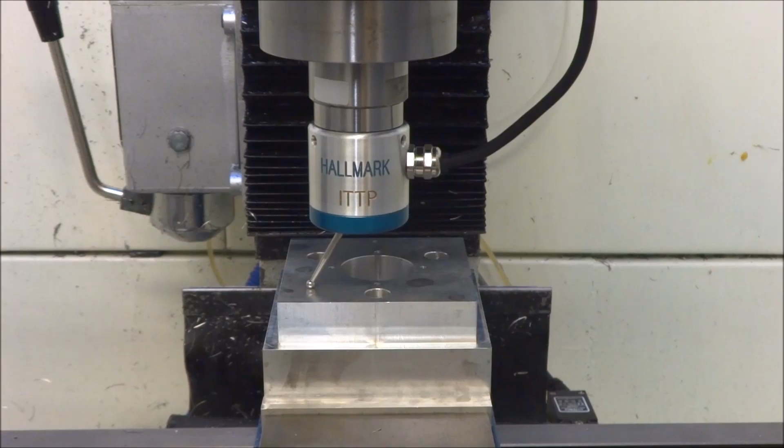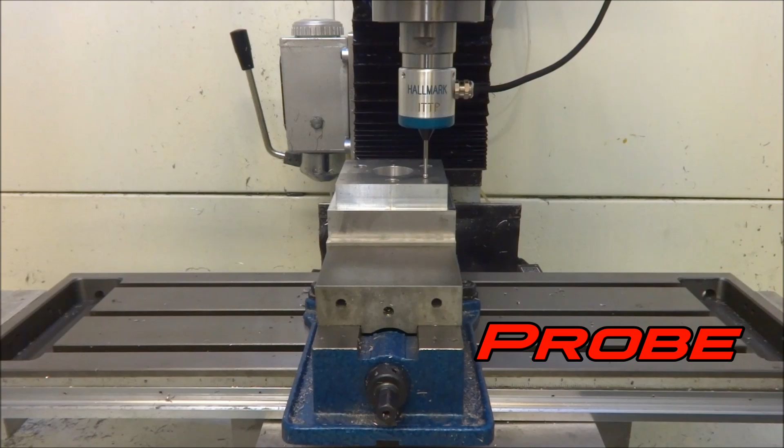Hey guys, I'm back out in the shop today doing some accuracy tests on the impact tolerant touch probe from Hallmark Designs. Please excuse the background noise, I've got a portable AC running. It's just unbearable without it.

The first thing I want to do is make sure there's no run out on the touch probe. I've rechecked it. I've had too numerous to count the crashes I've had already developing the probing routines, so I wanted to recheck it and make sure everything was okay. In today's video we're going to be doing some accuracy tests.

One thing I've realized over the last few days doing numerous tests is because of the design of the contact surfaces in the impact tolerant touch probe, you really only need to concentrate on one 90-degree quadrant. That's with checking for run out and also doing probing. You can see here that I've got it dialed in, there's no run out whatsoever on the touch probe.

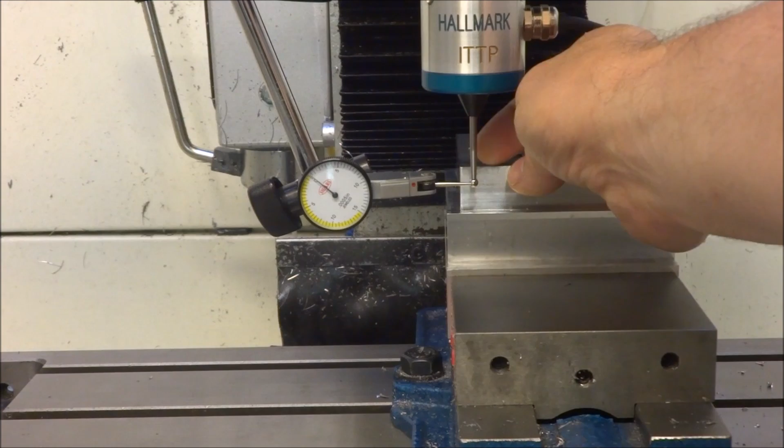So once we verify there is no run out, we can check pre-travel. The first test is to check pre-travel, and I'm going to probe into the work and see how much deflection we have when the needle stops. We're resting on the dial indicator here.

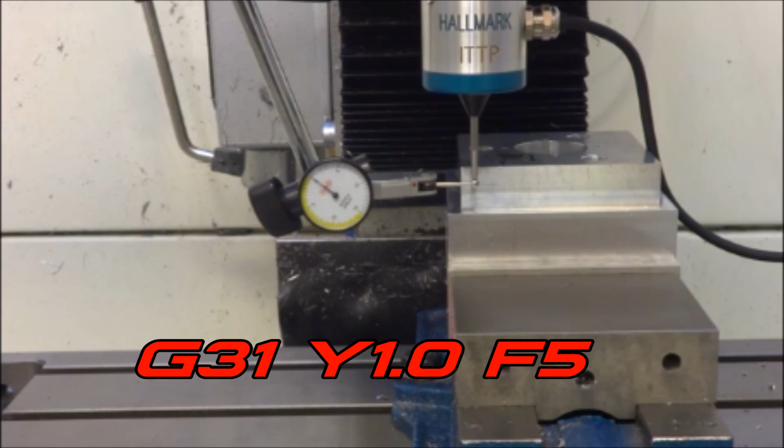To check pre-travel, we want to simply type in on the MDI line under the MDI tab: G31 Y1.0 F5. G31 is a probing move, and it will stop as soon as the probe makes contact. I'm going to probe in. Okay, it stopped, and it looks like we are at 1.5 thousandths, 0.0015.

I'm going to turn it about 10 degrees and go again. Still about the same, about 1.5 thousandths. Back off, turn it again about 10 degrees, thereabouts approximately. Again, 1.5 thousandths.

Back off, turn it again about 10 degrees. Okay, that crept up a little bit more, maybe 0.0018 if I had to guess.

Now that we know what our pre-travel is, let's start doing some accuracy tests. First, I want to go over some important things you should be aware of when using any touch probe. Number one, you want to indicate the touch probe in the same orientation every time you use it for better accuracy. So if you're going to have your cord going out at 90 degrees, indicate that. Likewise, you should have a way to disable your spindle motor.

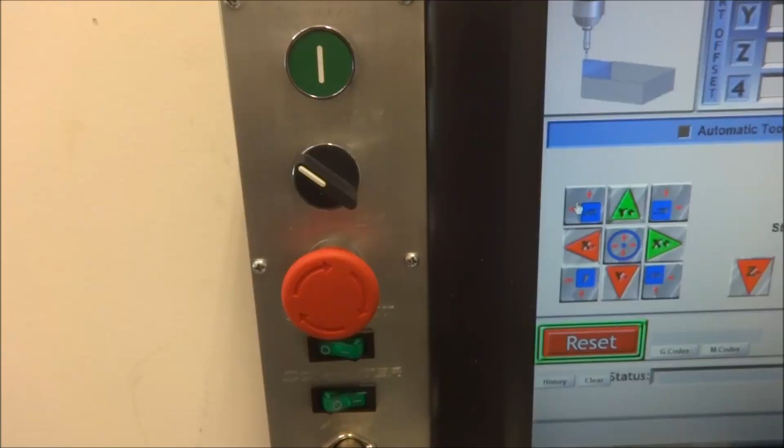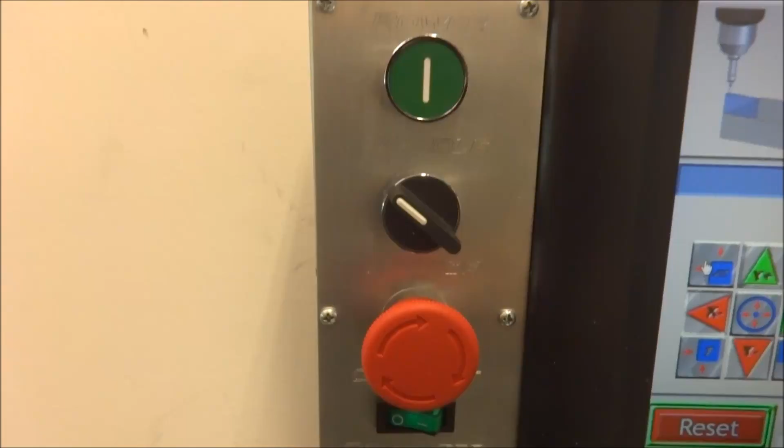Now, I originally installed a key switch here to turn off the spindle. However, I found the key was cumbersome, it kind of hung in the way of the e-stop, so I switched it out with just a switch that I can turn off or on. It's good to have that, because you don't want the cord whipping around and causing any issues or damage to the probes.

For the first test, I want to first make sure that we get the pre-travel set correctly. Now, we measured anywhere between 0.0015 and 0.0021. So if we go with the highest reading, we have about 0.0042 of pre-travel. So we're going to take that information and set that up in our tool data.

Okay, so we want to set that up in our tool data. Here is our tool information. I have set up my touch probe as tool number 99. I figured my offset in the first video, and so the diameter, taking into consideration the pre-travel, I came up with 0.1538 is what it really should be according to my pre-travel measurements, but I've done a few tests already and it came out to be 0.1534.

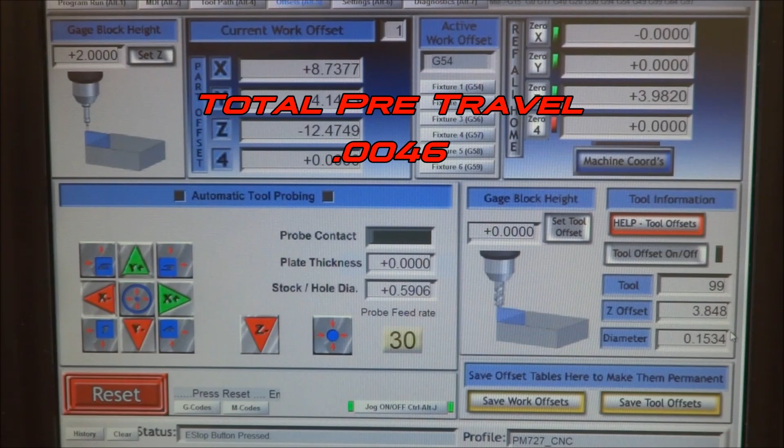Now, I'm not sure about all the different machines and software probing routines that are out there, but the way I've gotten my probing routine set up, I made a couple of changes from the first video. The first thing you might notice is I added this probe feed rate. This is a user-defined DRO, and you can use this to help determine at what feed rate your particular machine gets consistent results. This particular machine, I've done a few tests here, and at 30 inches per minute I can get consistent results. Having this user-defined DRO kind of helps you get the best results for your particular machine. So that is something new that I recently added.

Also, I'm going to be probing the inside of a bearing. The reason being is I know this particular bearing is 15 millimeters internal diameter, which is 0.59055, so that way I can check the accuracy without any question.

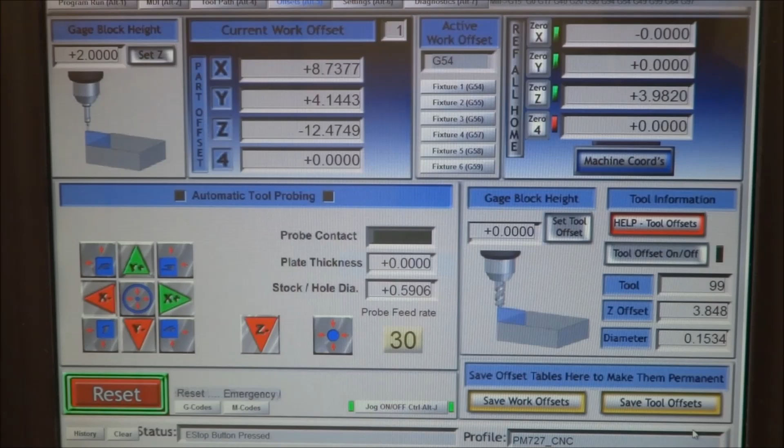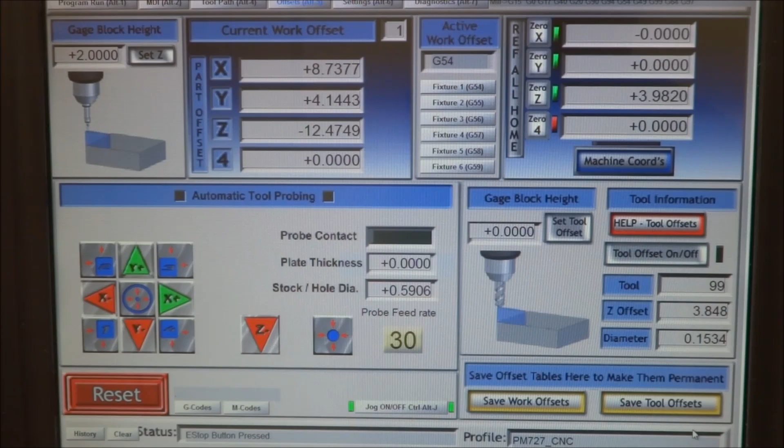Next, this particular DRO will output the dimension that Mach 3 gets as its result. So this is how I am checking the accuracy of my pre-travel, and it's fairly close. I measured 0.0021, so you double that, which gives you 0.0042, and after doing some probing tests I ended up with 0.0046. So pretty close. Let me show you how I came up with this result.

Okay, so here is my bearing. The internal diameter is 15 millimeters, and we're going to probe it at 30 inches per minute.

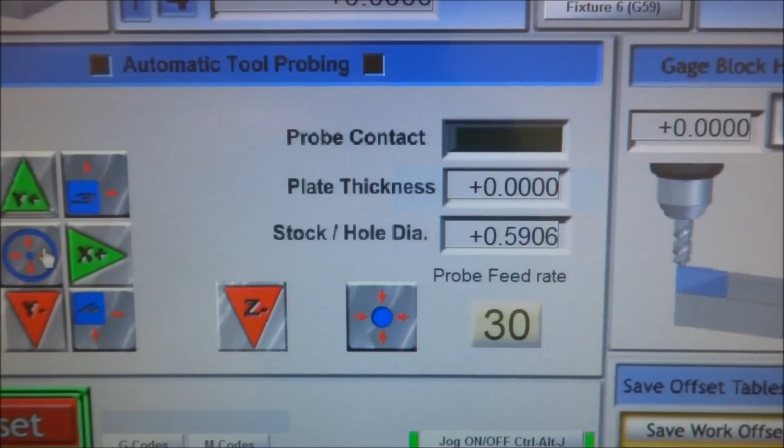Alright, you can see we're at 0.5906. So what I want to do now is just run about 10 probes at 30 inches per minute, and we'll record our results, and we'll see how consistent we are.

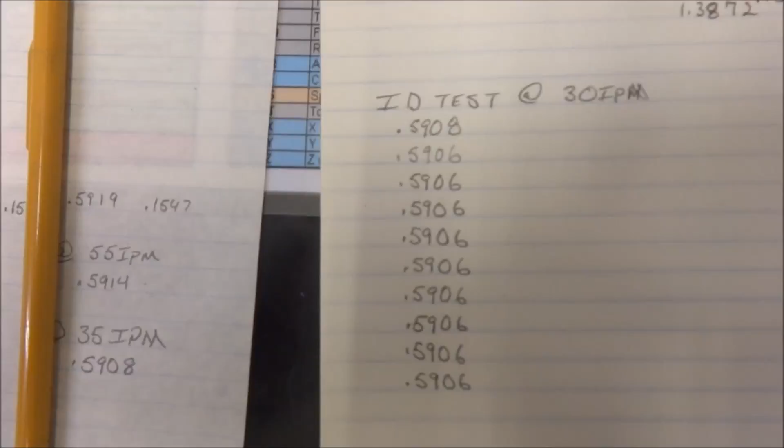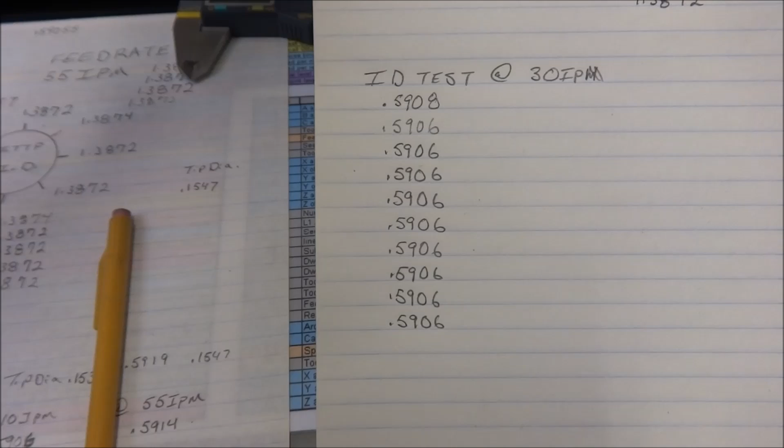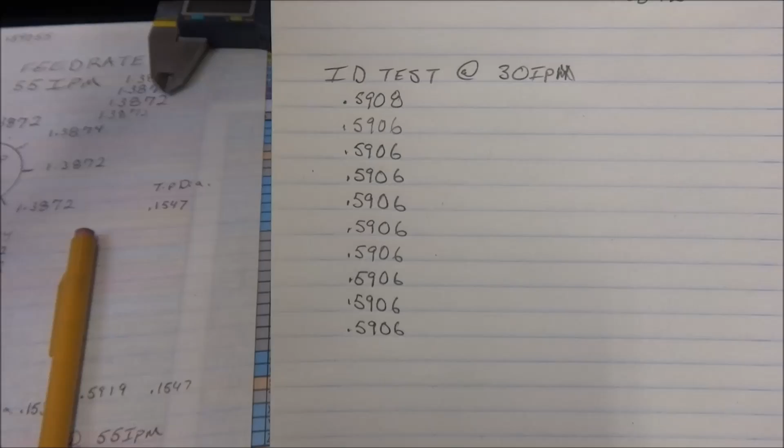Alright, let's look at the results. So I ran 10 tests at 30 inches per minute, and they were all consistent except the first one, which was 0.5908. All the rest were 0.5906, which is really good and consistent.

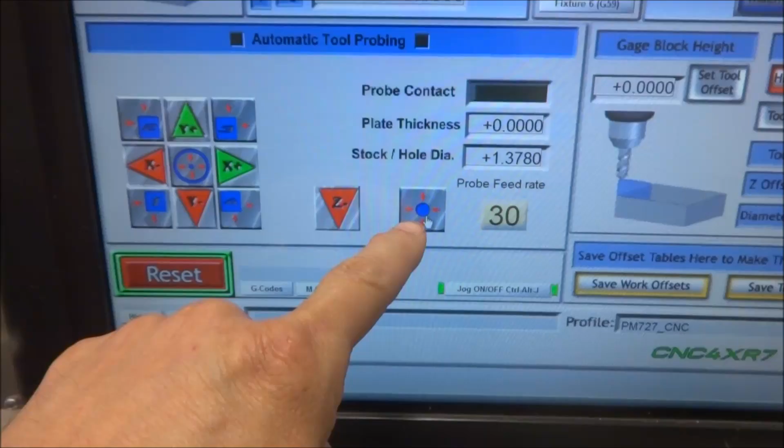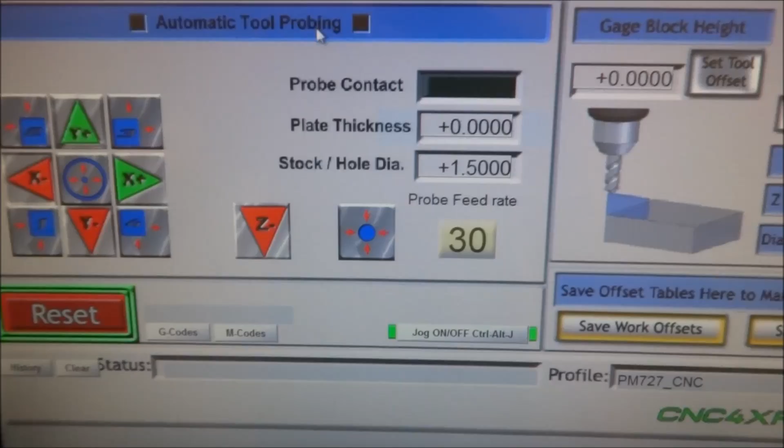Now let's probe the outside diameter of this bearing. This bearing is 35 millimeters, which is 1.37795. Again, we're going to be using the outside dimension probing routine. Now, whenever you're using this particular routine, you want to input the approximate size of the stock, and don't forget to put in your feed rate. Again, we're going to run about 10 different probes, and let's see what we get, and we'll record our results and see what we find.

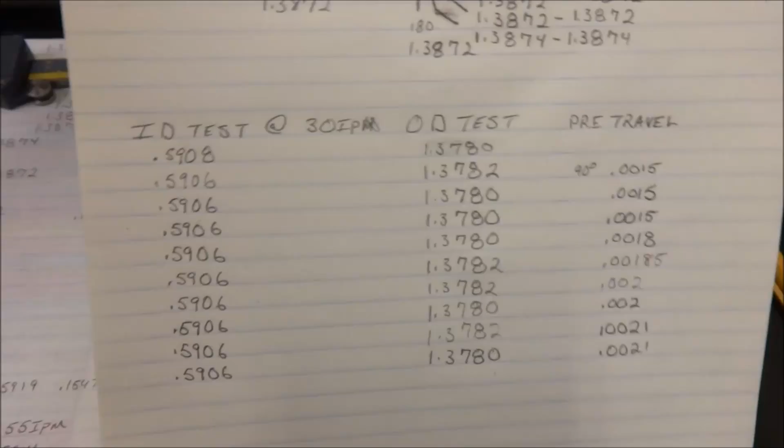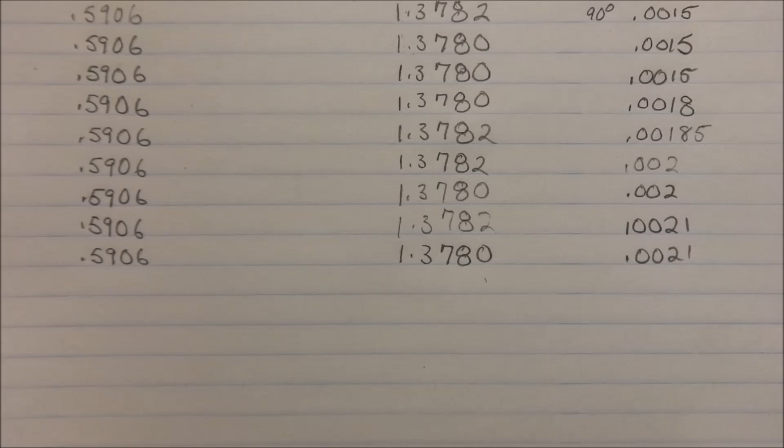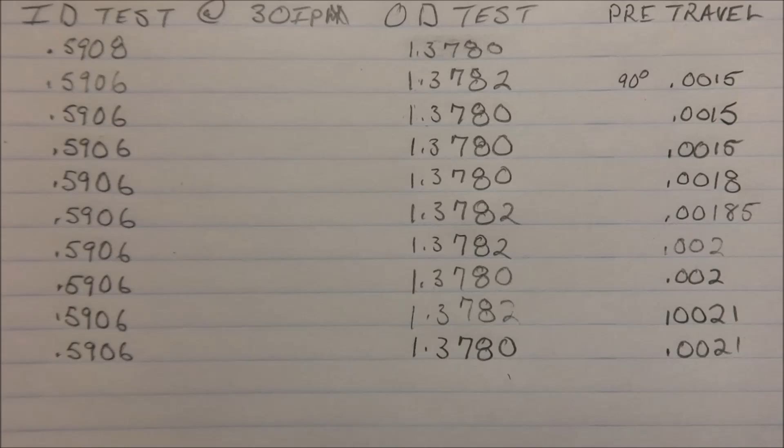Okay, after 10 probes on the OD, you can see the results. Still really consistent, 1.3780, and those were most of the measurements, and 1.3782 happened 4 times, so about 60-40, I guess. But the variance is very, very small, really accurate, and I'm really happy with the results I'm finding.

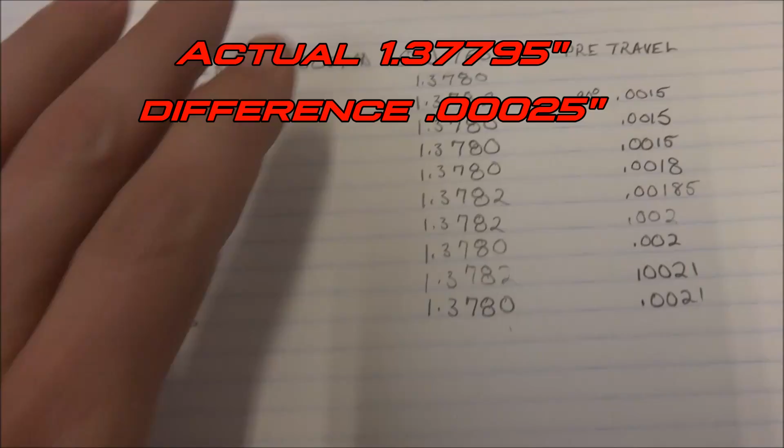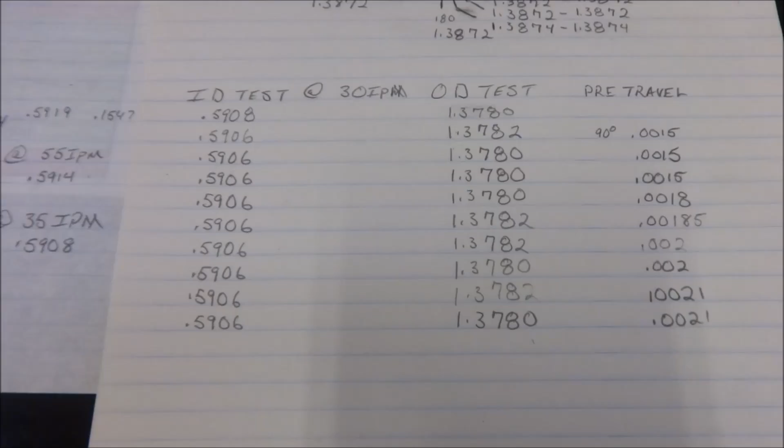So you can see from these tests that we get very reliable and very consistent results with the impact tolerant touch probe.

So the next test for accuracy that I want to check is doing the Z negative probing routine and finding the top of the stock. This is probably going to be one of the more used probing routines, so I definitely want to check and see what the accuracy is for this particular routine.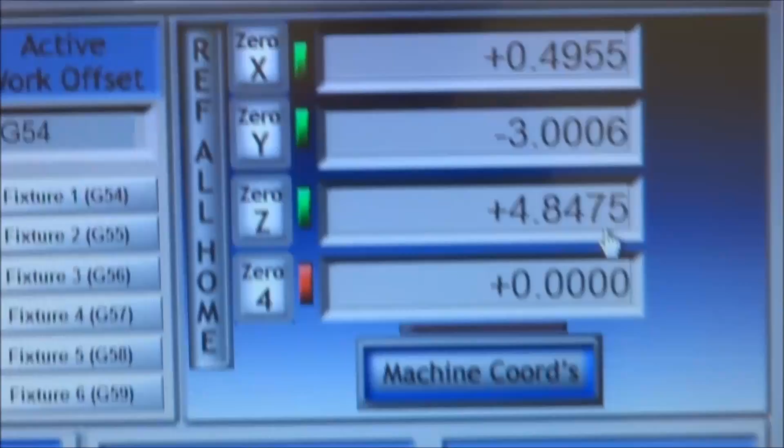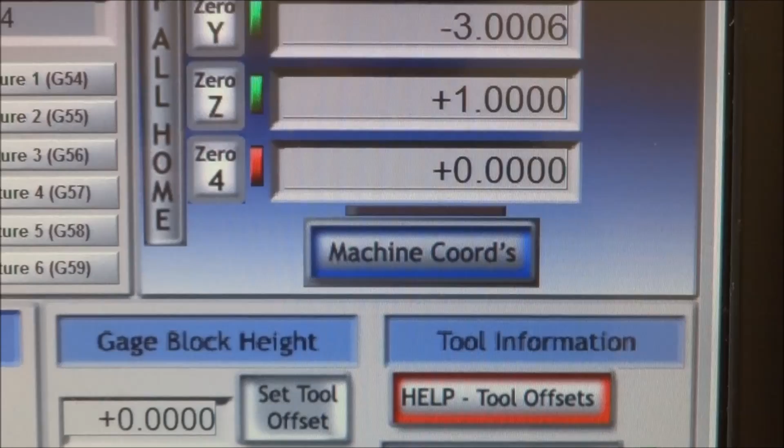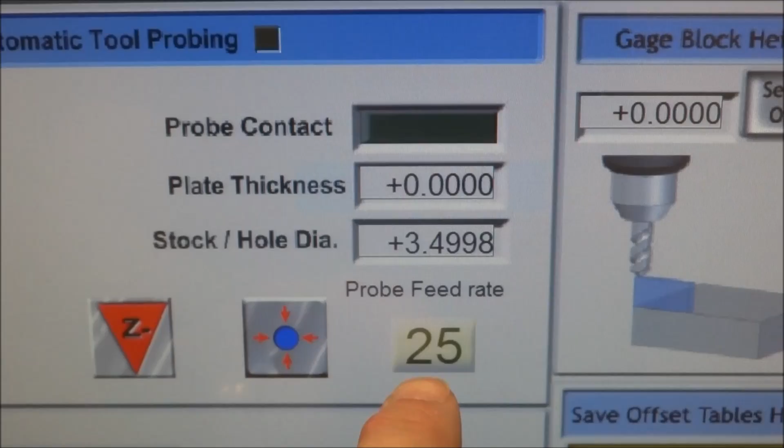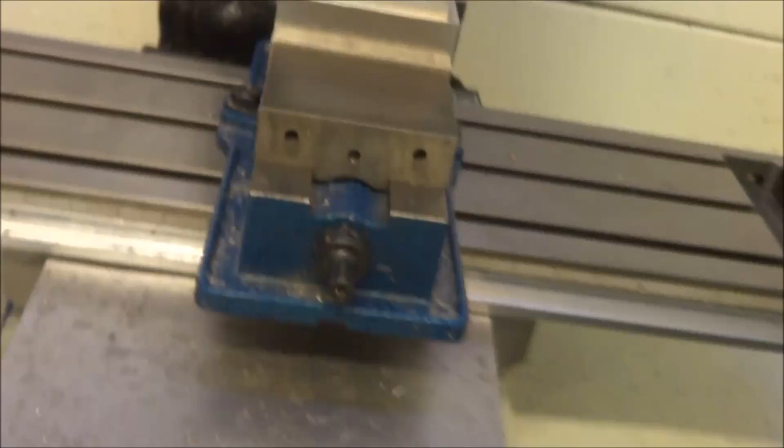Now, the touch probe is always going to return a measurement of 4.8475, because the particular macro moves 1 inch above the part after it checks the Z0. So we're going to use our machine coordinates, and this will always give us the exact measurement from our home switch. So this number right here will vary after each probe. Alright, so we're going to be doing our first 10 probes at 25 inches per minute, and we'll record all of our data here, and we'll see what kind of results we get. I'm also going to vary the start height just to try to get some consistent results. So here we go with the first.

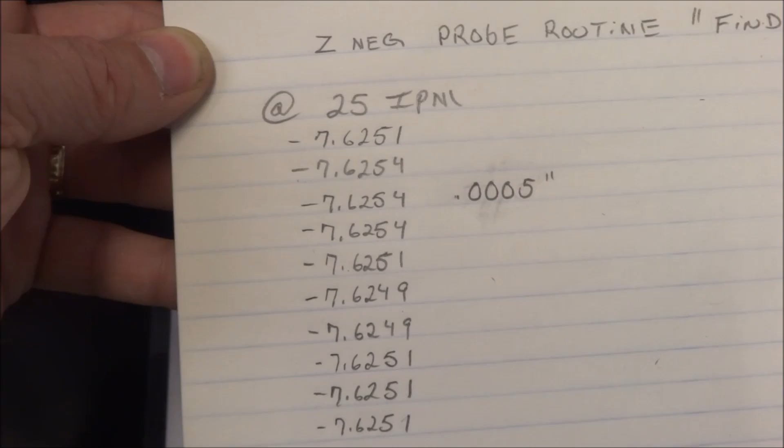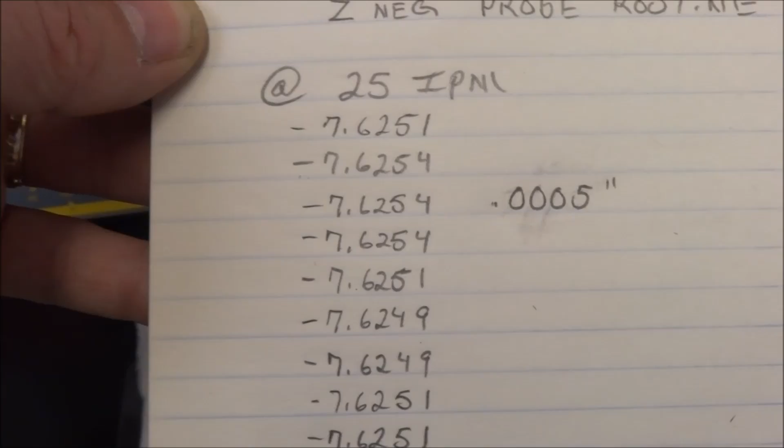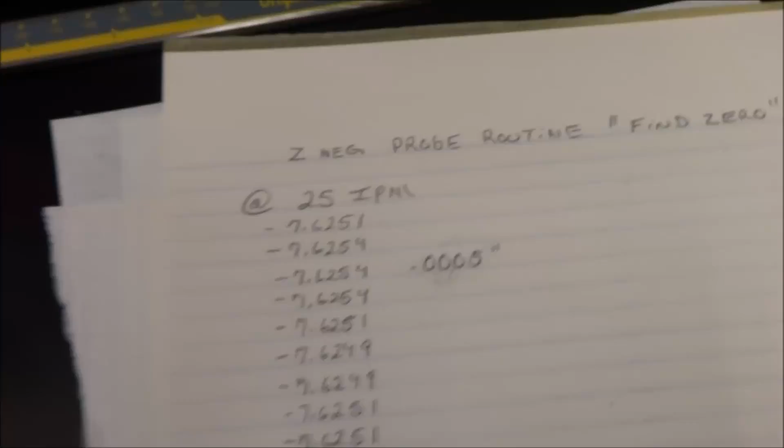Alright, let's check our results. At 25 inches per minute, it looks like our lowest reading was 7.6249, right there in the middle, there was a couple. And then our highest was 7.6254. So the difference between our lowest and highest reading is half a thousandth of an inch. I would say that that is pretty accurate. Alright, so that's at 25 inches per minute.

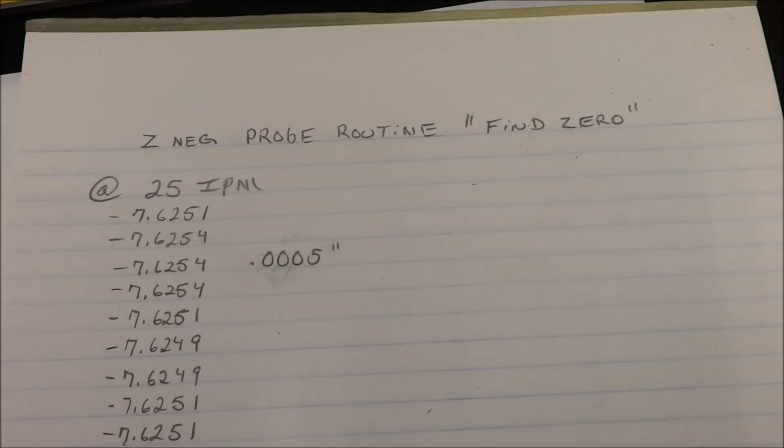Let's try 55 inches per minute. We'll do the same routine and we'll see what we find. Okay, so we'll type in 55 inches per minute in our DRO and record our results.

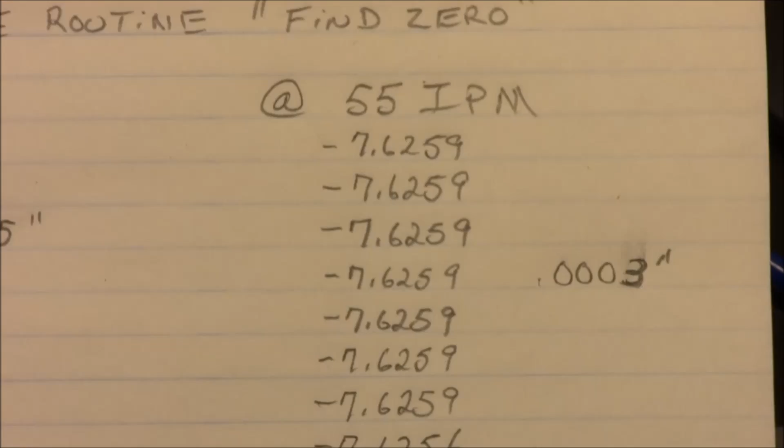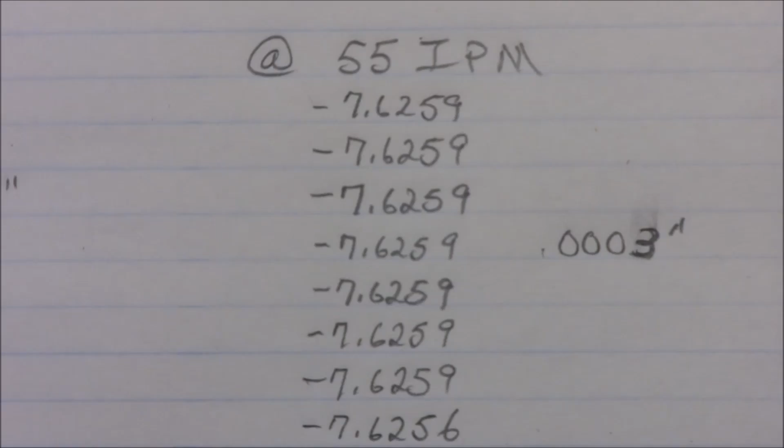At 55 inches per minute, we're getting readings around 7.6256 and 7.6259, a difference of 0.0003. So less than half a thousandth of an inch.

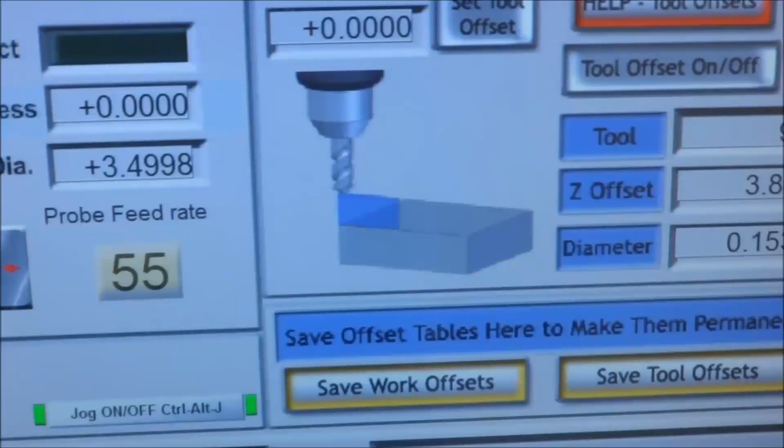Pretty consistent. The Z probing routine is only going straight down, so I would expect to get more consistent results with the Z probing routine. But even with the inside dimension and the outside dimension, you can get really accurate measurements.

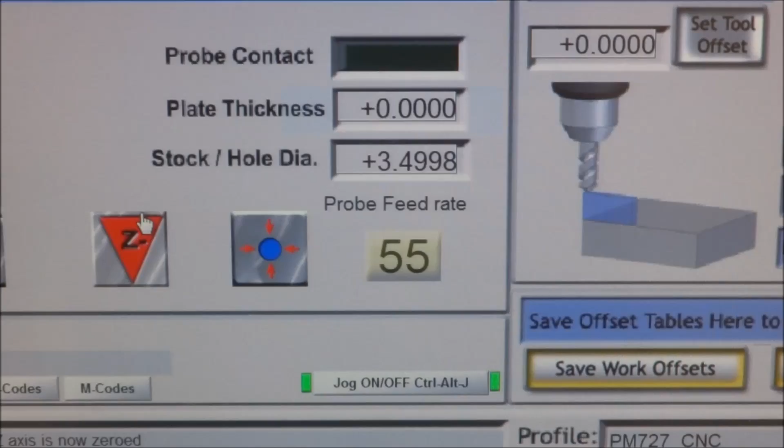So if you want to set up your part and find, say for instance, this corner, you want to park the probe about a ½ inch in from each side of the stock, as well as a ½ inch above. The probing routine will find your Z, set your Z height, and find the corner.

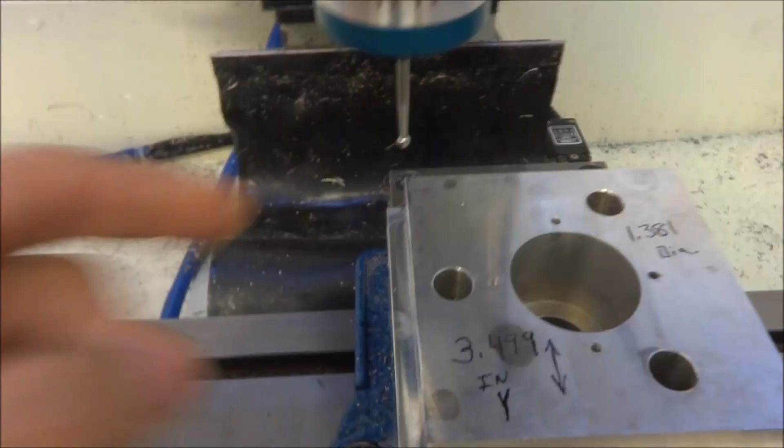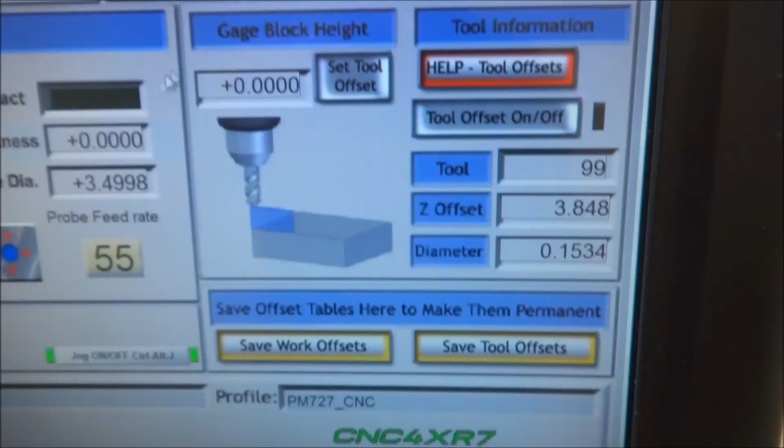Just like that. And now we have referenced our part, and we can start machining. We have also set our Z height. If we turn our tool offsets on, you will see that we're about a ½ inch above the part.

So you can see with these results, the accuracy of the impact tolerant touch probe far exceeds my expectations. I'm very satisfied with these results.

I happen to be using input 15. You want to set up your Mach 3, make sure your probe is active. This is up under ports and pins, input signals. Enable the probe, set it up for port 1, and whatever pin you're using as your input signal. I'm using pin 15, and you want to set it up for active low.

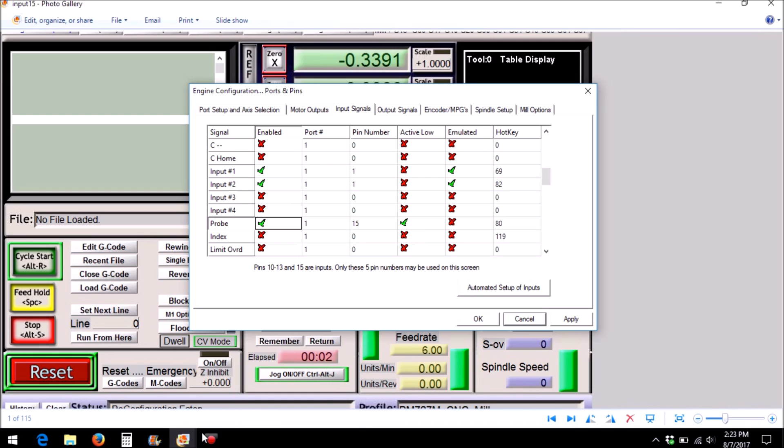The probe is designed in a rest position to make contact. So 5 volts will always be going to the input, and this input will be high in a normal state.

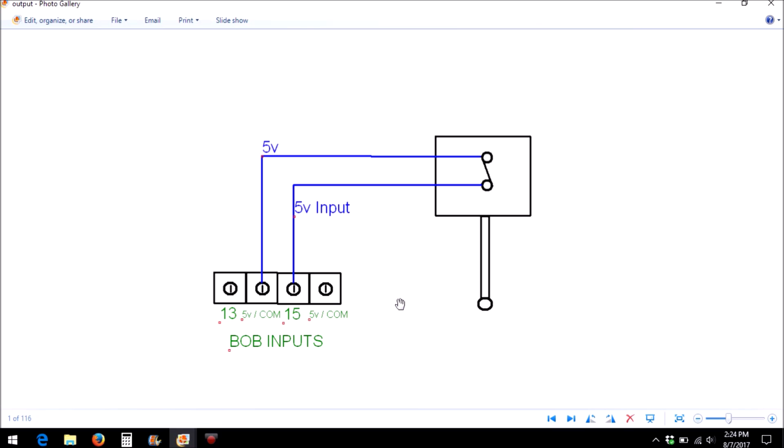And when the probe contact is made with the probe, this signal will go low. So you want to set it up for active low. This is so the probing routines can check to make sure that this probe is not tripped, and the only way to really do that is to have this as a normally closed set of contacts.

Now the connections I went over in the previous video were specific to my machine. However, it's just a 5-pin DIN connector. You can pick up a 5-pin DIN socket online, and we're going to be using pins 4 and 5.

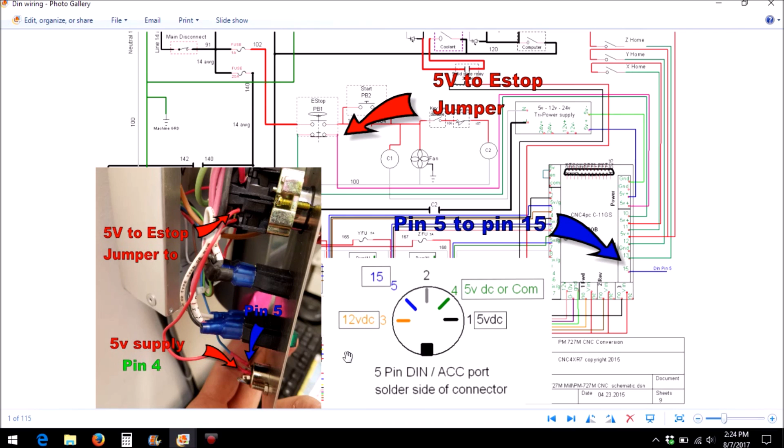Now these are standard pins used on a MIDI connector. And here is your standard MIDI connector, again pins 4 and 5.

So if you need an extra long cable for whatever reason, you can pick up a basic keyboard extension cable with 5-pin DIN connectors on each side. This one I picked up was 10 feet, and they come in 3, 5, 10, and 15 foot lengths.

So if you need an extra long cable, you can simply clip the end off and wire it into the probe. It does come with a 6-foot cable for non-Tormach owners, and I think for Tormach owners it comes with a 3-foot cable, because their DIN connector is right there inside, right beside the mill.

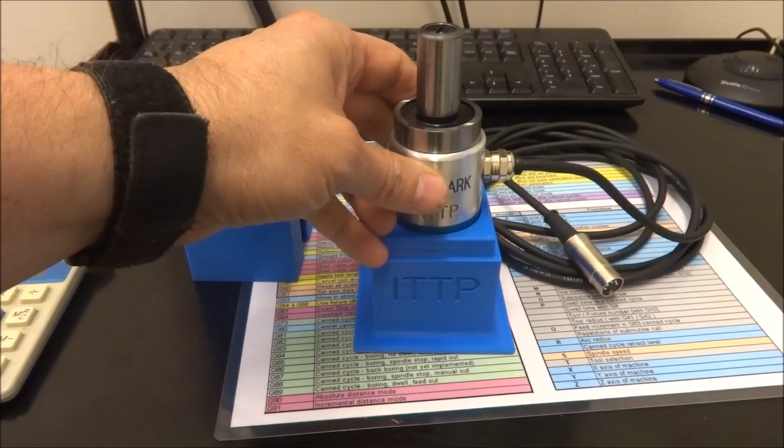You want to store your impact tolerant touch probe in an upright position. So I decided, why not take this opportunity to design and 3D print a nice little storage case for the impact tolerant touch probe.

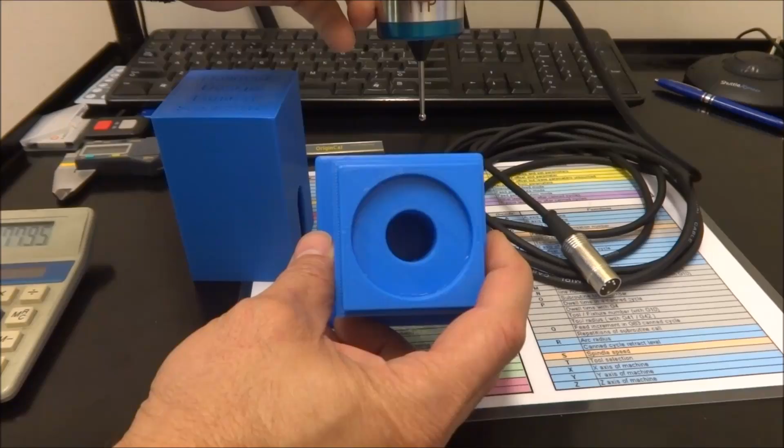So you have clearance here for the stylus. I did a little engraving in there and also made a nice cover with the serial number of my touch probe. This is 417.

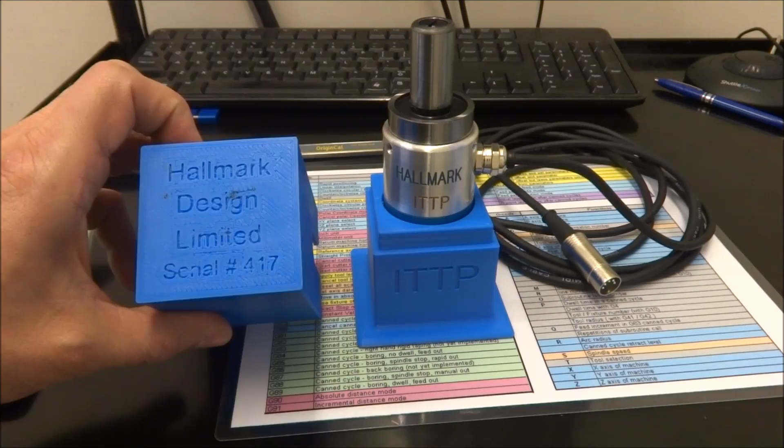So now I can keep it nice and secure, keep it out of the elements, and store it when not in use.

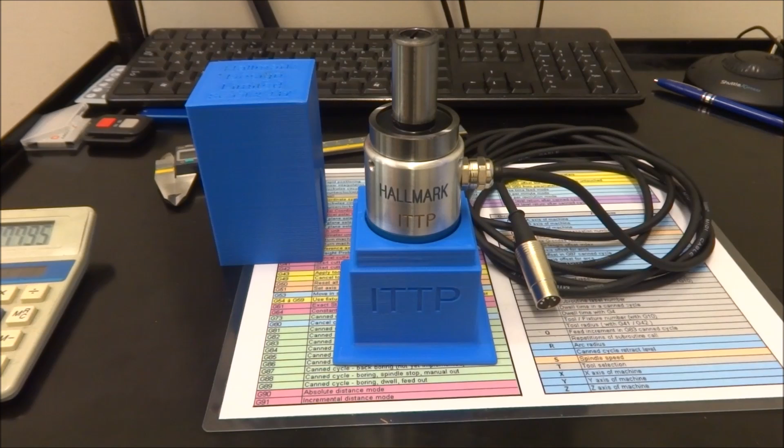Well, I guess that wraps up this video on the accuracy test for the impact tolerant touch probe. As you can see, this is very accurate, not to mention the ability to be crash resistant is something that I really do need.